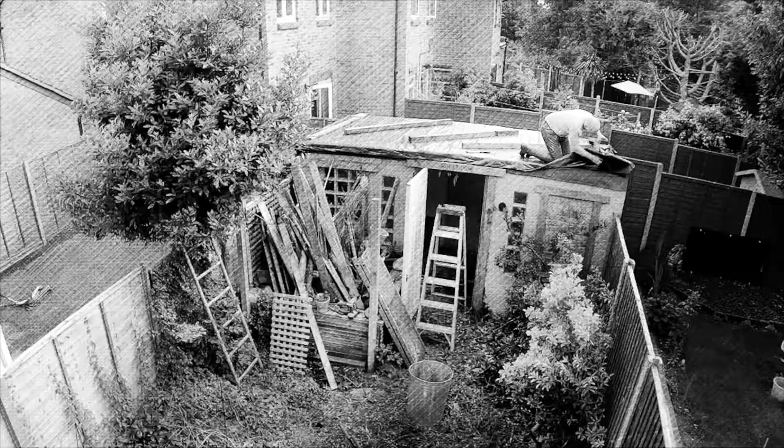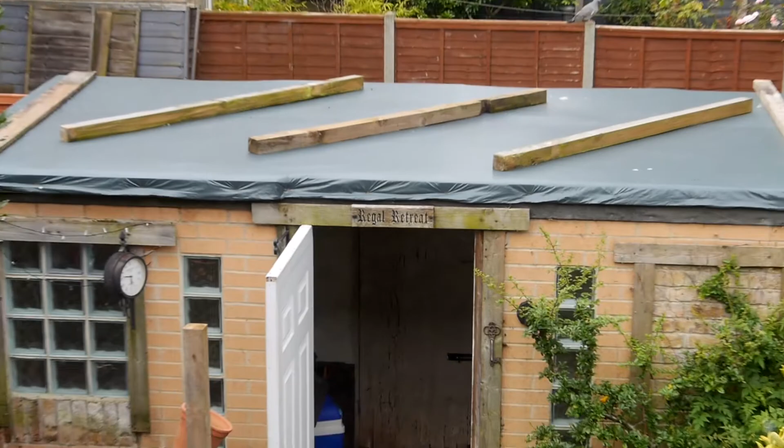In this episode we're going to be talking a little bit about that random outbuilding out in the garden, which is eventually going to become my studio/office space. At the moment it's just completely full of random crap and the roof leaks like a sieve, so it's pretty much unusable for anything at all. So the first thing we need to do is try and make it watertight so that we can dry everything out, and then we can remove all of the random stuff that's in there and start thinking about how we are going to renovate it.

Because the roof is completely full of holes, it really is just going to be pointless to try and repair that. So I'm just going to take the whole roof off and put a new roof on. I'll talk a little bit more about that later in the video. But first, let's go back to just after we moved in and take a look at the state of play of things at that point.

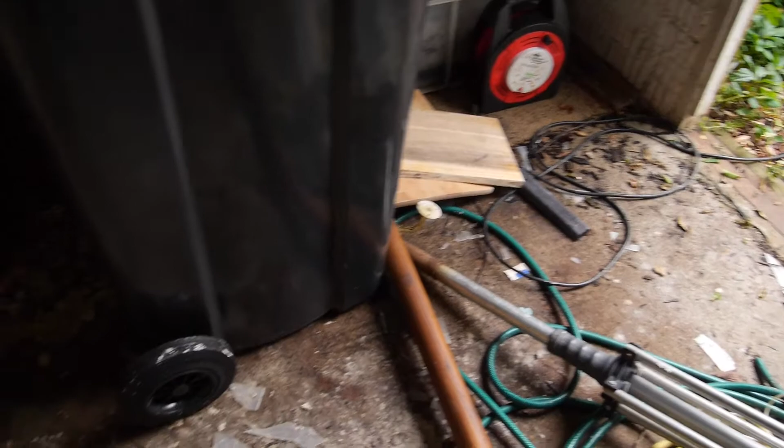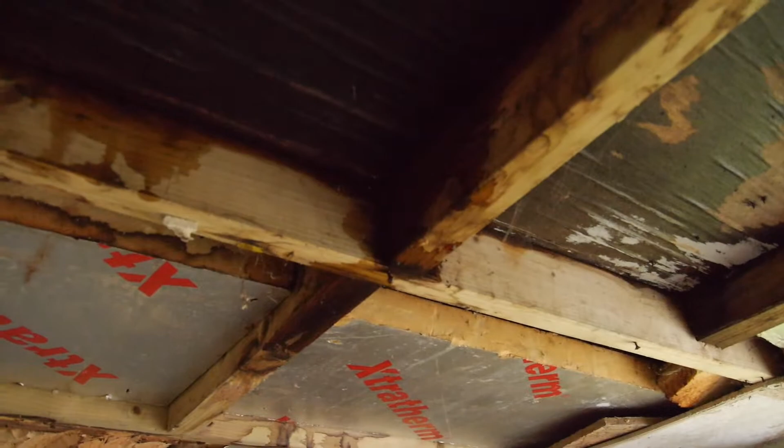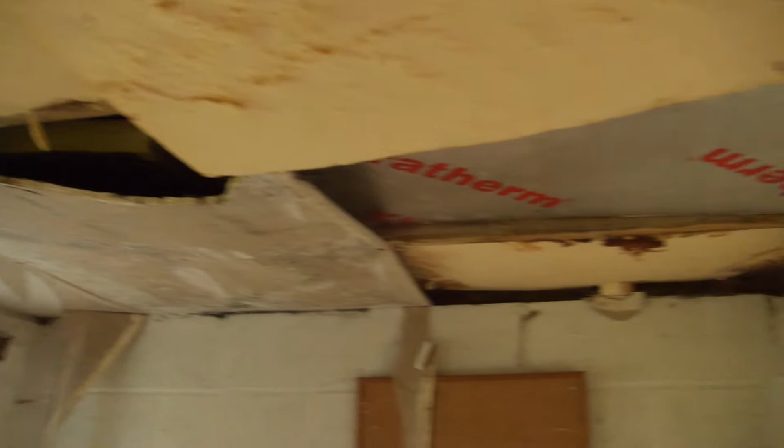We've had a lot of rain over the last couple of days and the floor of the studio area is just completely and utterly soaking wet. You can see this bin is just covered in water, and there's a big pool of water here at the back as well, lying on this table. And if you look up at the ceiling you can actually see it dripping through these boards here. So clearly there are leaks going on all over the place in this roof. It really is just completely and utterly past all usefulness.

So really the very first thing we have to do is try and get this watertight, because all of this water on the floor is going to be doing no good whatsoever to the concrete, and it's going to be getting into all the walls. We need to dry this place out before we can start doing anything else. Without removing the roof and replacing it completely, the only thing we can really do is put some kind of cover over the top of the roof to try and stop it getting wet, and that will hopefully allow all of these beams to dry out and get the floor dried out.

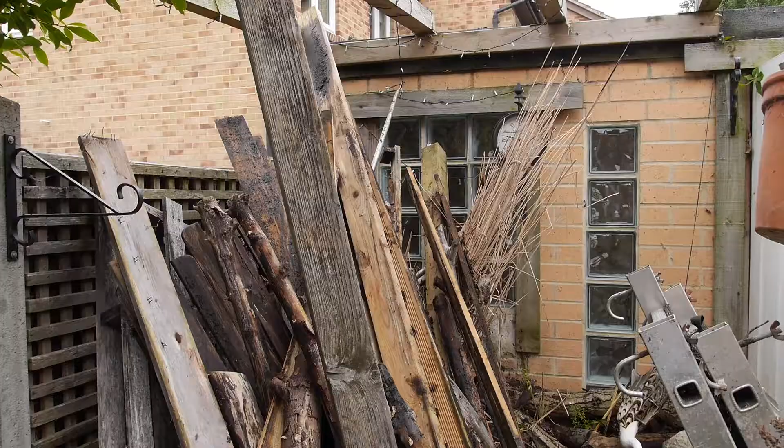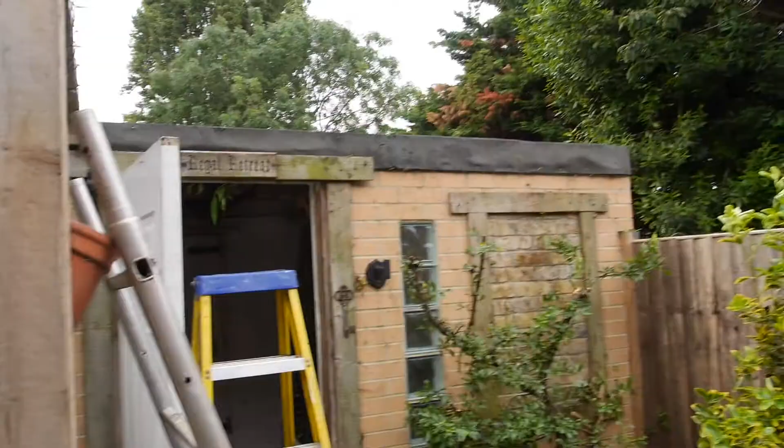It's really no wonder that this roof has been leaking, because look at all this stuff that's just been piled on the top of it, right in the middle. There's not just wood, there's some steel here as well. This is weighty stuff, all weighing down in the middle of the roof, so it's really no wonder that it leaks. It's pretty difficult to believe, but all of this crap, and whatever this is, was all on the roof. Not only that, but I noticed there are some gashes in the lining of the roof, which I think happened when they slid this stuff up onto the roof. So not only did the weight of it break the roof, but they actually broke the roof just by putting it up there in the first place. Honestly, these people, they never cease to amaze me.

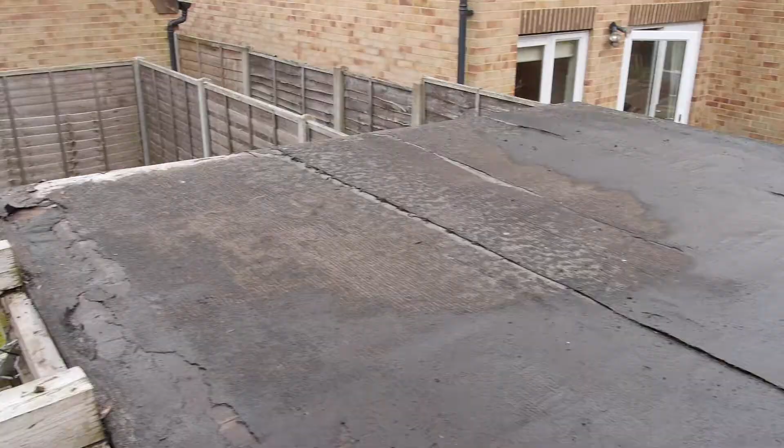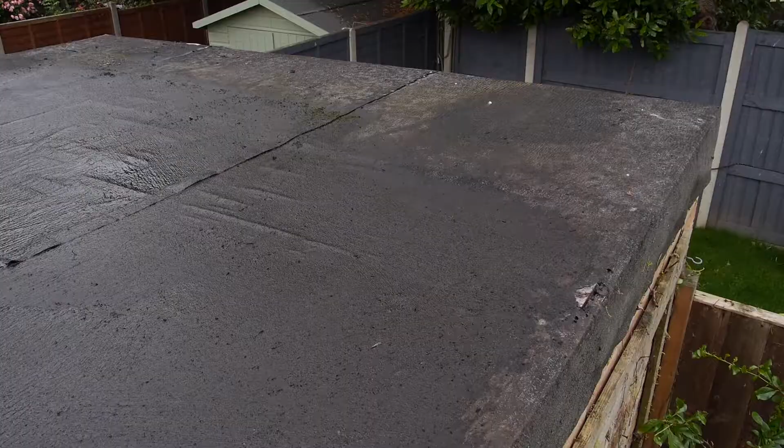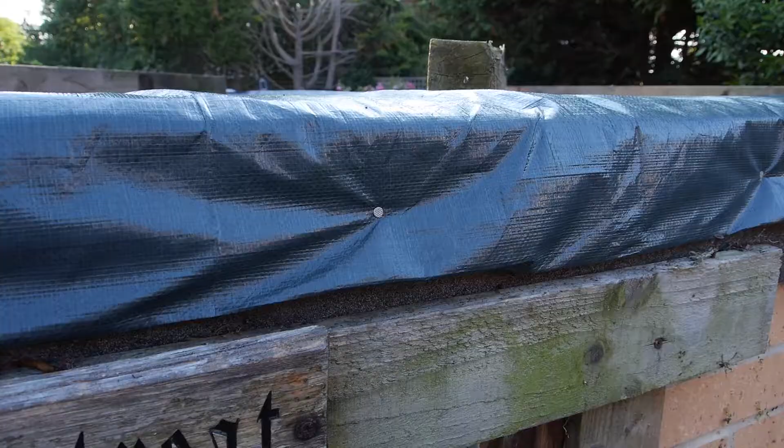So this is looking a lot better now. I've cleared off all of the stuff, and basically what I'm trying to do is just let it dry out a little bit. I'm hoping the weather will stay dry and some of this water can just evaporate. Then I bought a tarpaulin, which I'm going to put over the top, and hopefully that will stop the water from getting through this damaged roof and allow the interior of this room to dry out a bit. That's a reasonably good job done. This is only a temporary solution, it's not going to last all that long, but the idea is just to dry the roof out a bit and also dry out the concrete and stuff in there. Hopefully it's not going to make too much flapping noise in the wind, that's why I've put these planks over the top, just to try and hold it down a bit. But it's tacked all the way around, so it should be relatively stable even when it's windy.

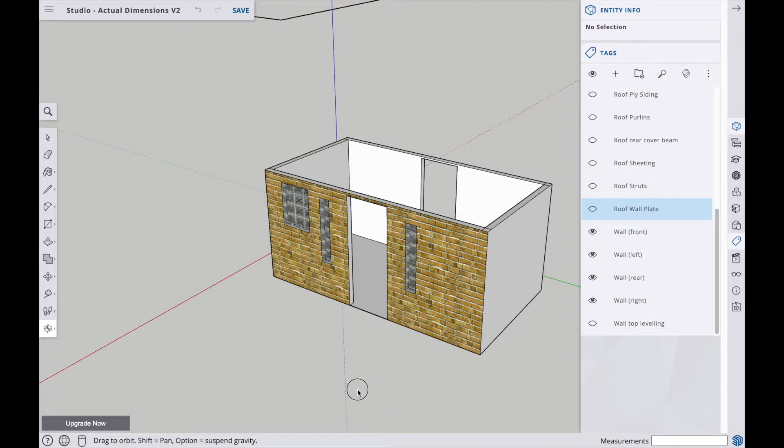So let's talk about the plans for the new roof. Here we have a mock-up of the studio building, which I just put together in SketchUp. Obviously it's not perfect, the brickwork doesn't really look like that in real life, but it's a close enough approximation. And I've done all the measurements to make sure that it is the correct dimensions.

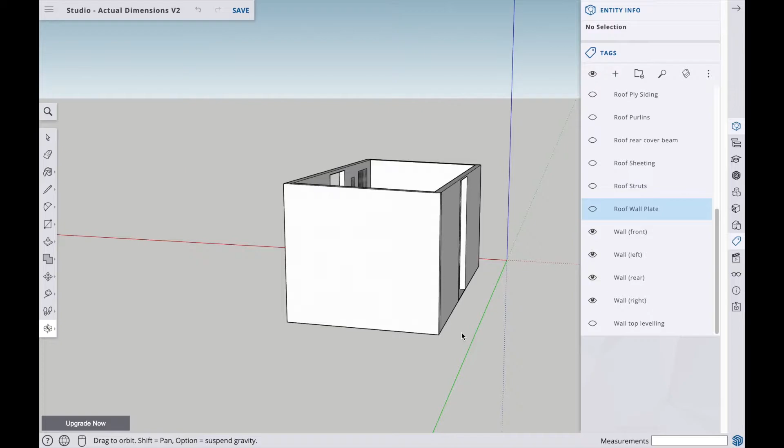If you look at the side profile of the building, you can see that there's currently a fall towards the back of the building, and that's because rainwater currently drains off the back of this roof. That is actually a terrible idea, because behind this building is a paved walkway which runs behind all the properties, and there is essentially nowhere for the water to go when it comes off the roof. So when it rains heavily, you just end up with big puddles of water standing here behind the building, and those will then wick into the floor and up the walls. There is a damp course along the brickwork at the bottom, which is good, but that amount of standing water is always going to create problems even if you do have a damp course.

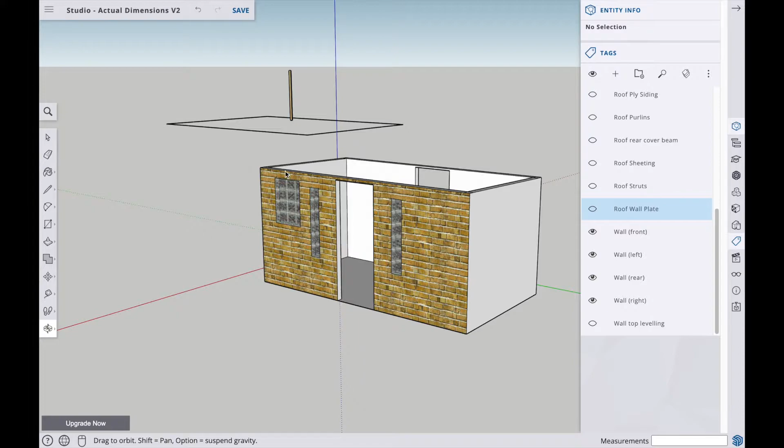So the plan is to change this and put in a new sloping roof which slopes towards the front of the building. And then what we'll have is some gutters running along the front, and we'll collect all that rainwater in a water butt, which we can use for watering the garden.

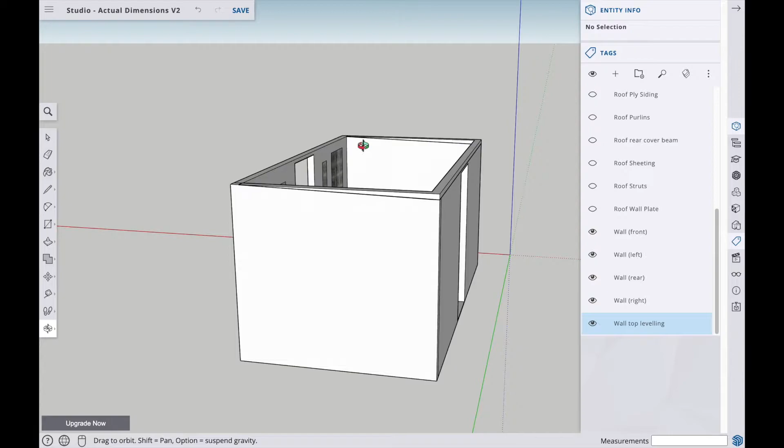So the first thing we need to do is level the walls. So I've added in a little bit of a wall topping here. That will essentially amount to another layer of bricks along the back, and I'll fill in the sides with concrete so that the whole top of the wall is level all the way around.

And then what we can do is put a wooden roof plate on top of that, which will be secured to the walls. The roof will be fairly heavy, so I don't think we have to worry too much about uplift, but we do need to tie it down in case of any storms or heavy weather.

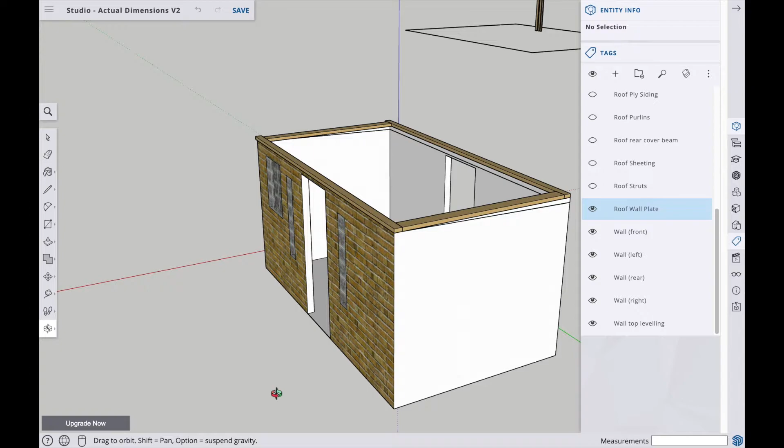So on top of this we will have some roof joists. Those will essentially give us our fall to the front of the building. This is a 4-degree fall, which is the minimum fall recommended for the box profile roof sheeting I'm going to use.

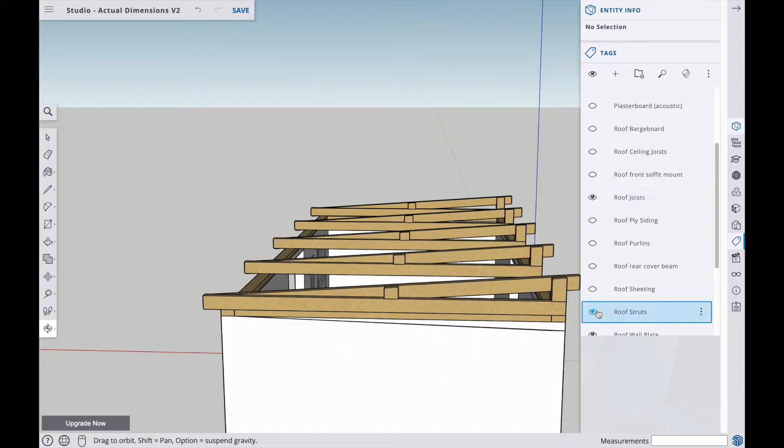Those will be secured in place by these struts, which will basically hold everything together. These ones in the middle aren't actually strictly necessary, but they'll help tie everything together because there'll be quite a lot of weight hanging off the bottom of this.

There's going to be Rockwool insulation and also acoustic plasterboard, so there's going to be quite a lot of tendency in the middle here for it to bow downwards. So if I tie these together in the middle, that will give it a bit more structural rigidity.

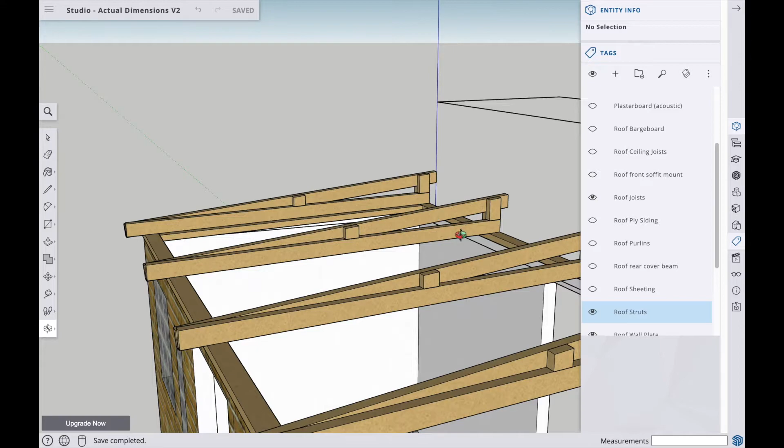Then on top of that we have our purlins, and that's going to be what the roof sheeting attaches to, and it also helps tie everything together and keep it rigid.

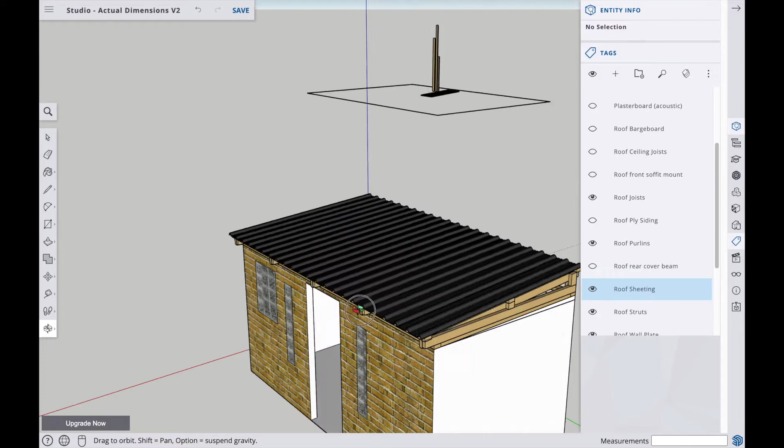And then we have our roof sheeting over the top of that, which is just standard box profile roof sheeting, but it will be grey PVC coated sheeting, which will hopefully be a bit quieter in the rain, and it will also look quite nice.

Then round the edge of that we're going to have some ply siding, which is just a covering to cover up the structure of the roof. That will be painted grey to match the roof itself. It should look quite smart.

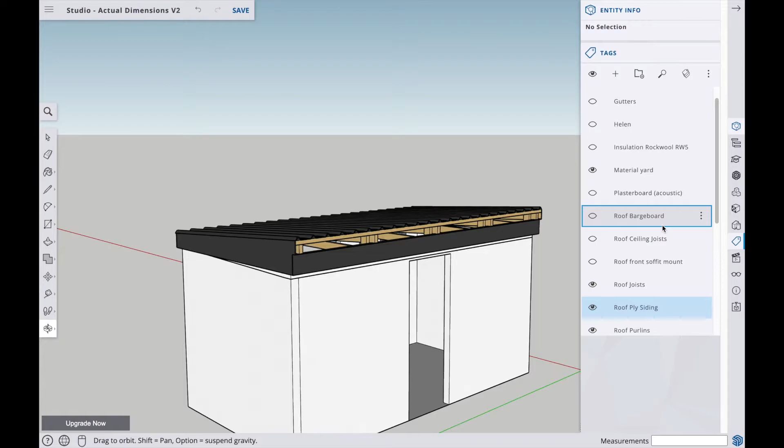And then on top of that we're going to have barge board around the edge of the roof as well. That serves two purposes - it stops moisture coming in the side of the roof, and it also aesthetically ties the whole thing together and keeps it looking nice and neat.

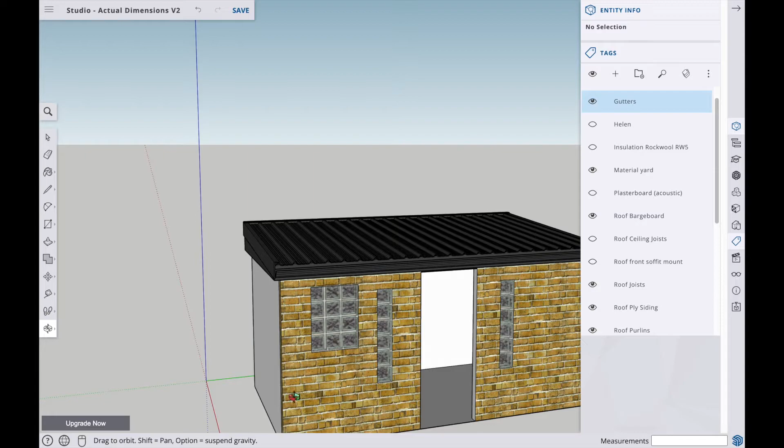As I mentioned earlier, we'll have some guttering along the front, and that will lead down into a water butt placed at the front here in the corner, which will collect any rainwater coming off the roof. And if we take a look at the underside of the roof...

We'll have some ceiling joists attached to the bottom of the roof joists, and that will be what the acoustic plasterboard attaches to, which will basically be under that.

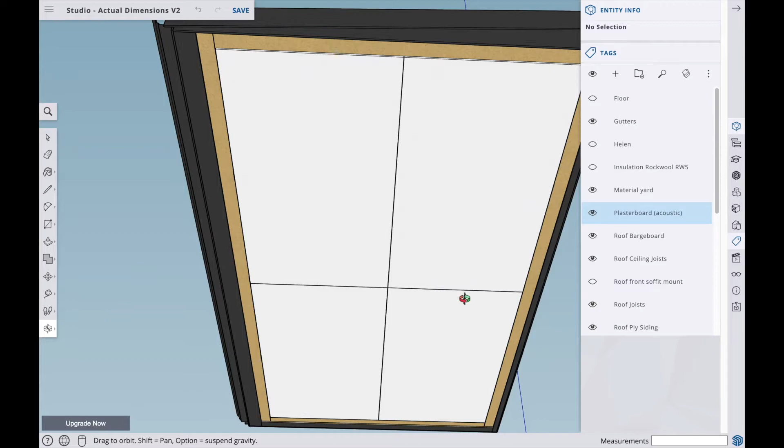And then inside the roof space we will have acoustic Rockwool RW5 insulation, which is the highest density Rockwool you can get. This is 100mm thick, and this should provide quite a good thermal and acoustic barrier between the noise inside and the roof sheeting outside.

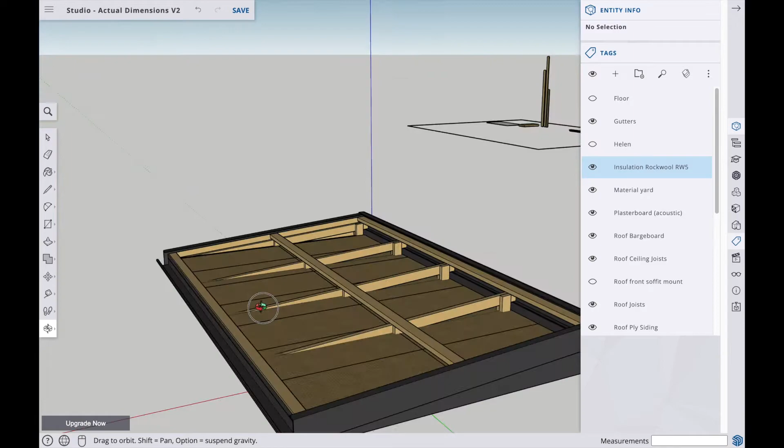So that will just be fitted in between the roof joists and cut to fit around all the different timber structures, so that it forms a nice tight seal.

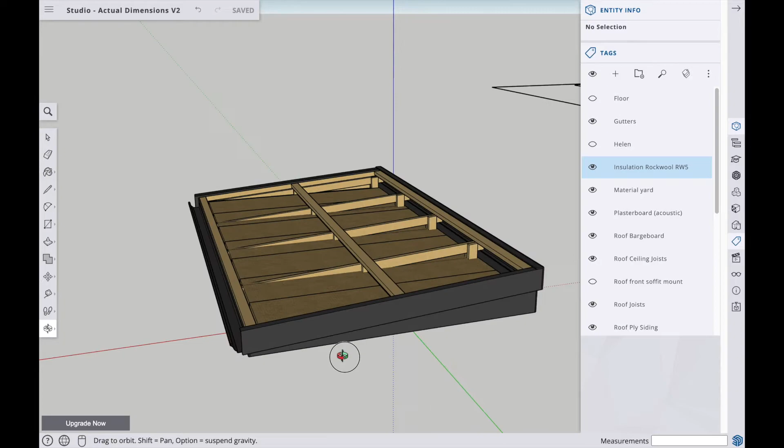So this is actually what is known as a cold roof design, because the actual surface of the roof itself will be essentially the same as the air temperature outside. All of the heat will be kept underneath this plasterboard and this insulation.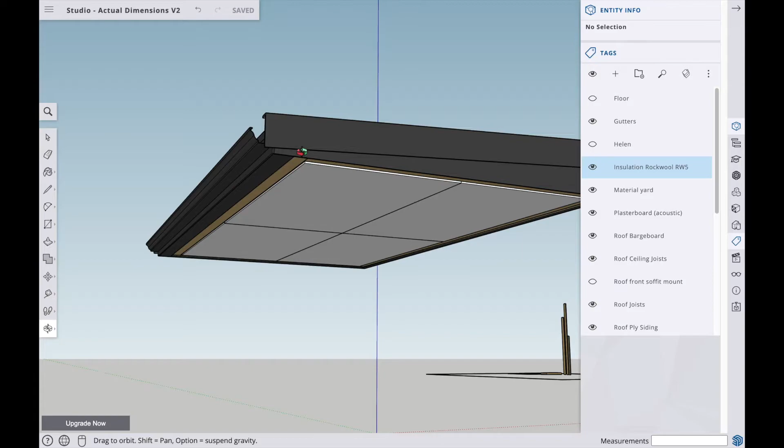And that will essentially mean that moisture which wicks through this will condensate on the inside of the roof structure. So to deal with that, in these soffits under the back and the front here, there will be little air gaps, and that will allow air to essentially run front to back or back to front.

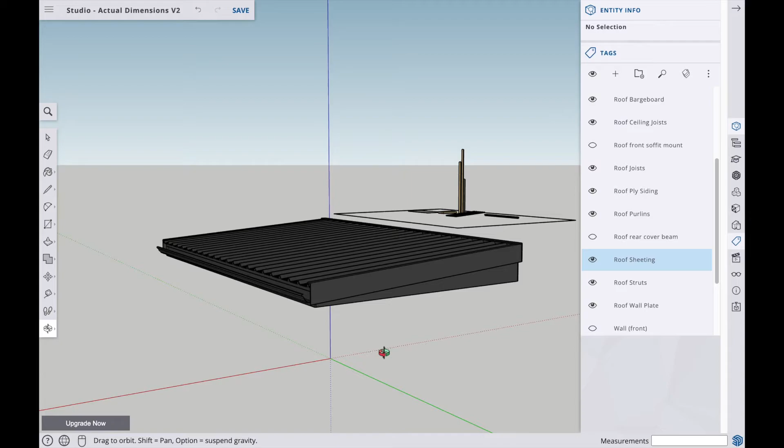This kind of roof sheeting inherently has little gaps in it anyway, in all of these little spaces here. So it's very easy for airflow to go through the underside of this roof and stop moisture from building up.

The eagle-eyed among you will have noticed that on this side of the building there's a bit of an overhang on the roof, whereas on this side there isn't. The reason for that is because there's a bit of an anomaly with the way this has been built. You can see that on this side there's a bit of a gap between the edge of the building and the fence line.

Whereas on this side the building goes right up to the outside of the fence line. That's because whoever built this assumed that the fence line on this side of the property is on the inside of the boundary, and the fence line on this side is outside of the boundary. That's quite a common feature in the UK, and it means you are responsible for the fence on one side of the property but not the other.

However, I think in this case the builder actually got it wrong, because we are actually responsible for this fence, and this fence is actually the neighbour's responsibility. During the sale we didn't receive any clear communication on which fence is our responsibility.

However, I've essentially deduced that it's this one because if you look at this fence line and then look at where the party wall is here - it's a little difficult to see on camera - this fence line is on the inside of the wall line. So that would indicate that if this party wall is the boundary between our property and the neighbour's, this fence is on our property and is therefore our responsibility.

Likewise, if you look at where this fence runs - this is the party wall on the other side of the property - you can see the fence line actually runs on the outside of that, which would indicate that this fence is on the neighbour's land and is therefore their responsibility.

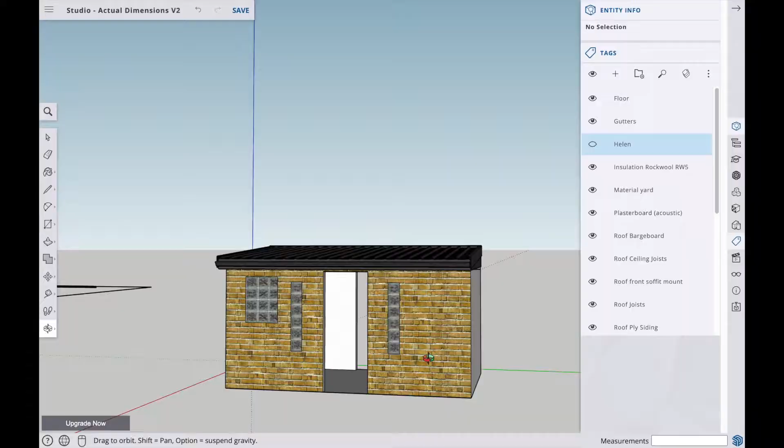So that essentially means that on this side I really cannot overhang at all, because we're already on slightly dodgy ground with this. If I extend any further this way, I'm definitely getting into the neighbour's territory. So this has to be flush on this side - there's not really much I can do about that, or as close to flush as possible.

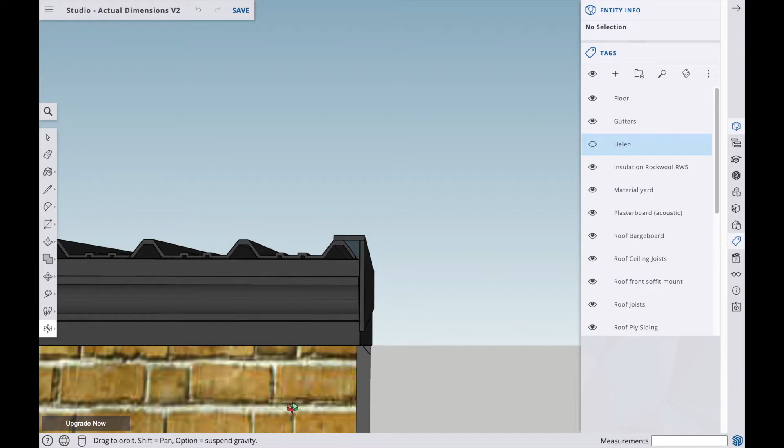Obviously I have to put the barge boards and the siding on there, so that's going to take it out a little bit, but hopefully by not more than about 20 mil or so, which isn't really a lot. However, on this side we have a bit of a gap between this building and the fence line.

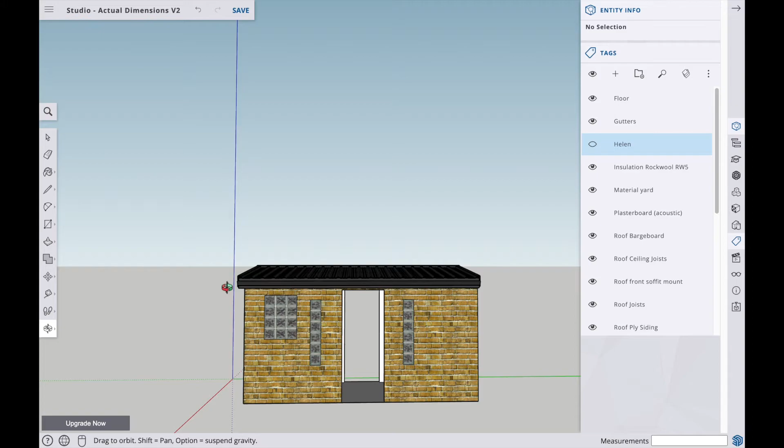So my plan is that eventually on the front of this building there's going to be some cladding, and that cladding is going to go all the way up to the fence line on this left hand side. That's just going to even things out a bit and make it look less lopsided, and it'll also tie this building into the fences which are going to go down both sides of the property.

So this here is a basic mock-up of the kind of design I'm hoping to go for. Most probably I'll have to make these fences slightly shorter, because there's a limit to how tall you can make fences in the UK.

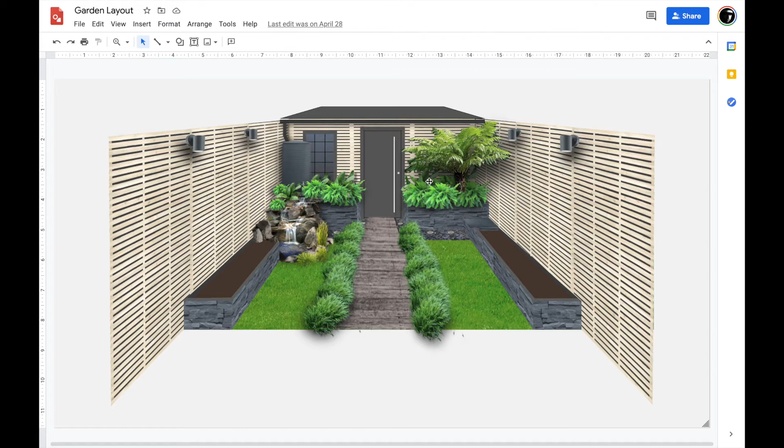So this will probably drop down a bit and this fence line will come along there, but essentially what I'm trying to do here is tie the front wall of the studio building into the fences so it looks like a continuous system going all around the property, and then we just have a door going into the studio at the back.

So in terms of timelines, the idea is really to expedite this and get it done as soon as possible, because that will allow us to free up the second bedroom, which I'm currently using as my studio/office, and we can make that into a proper spare bedroom, which we really would like to do.

So yeah, essentially we're just waiting for some time and a bit of extra funding, but really the idea is to do this before winter. So we'll see how that goes, but yeah, watch this space.